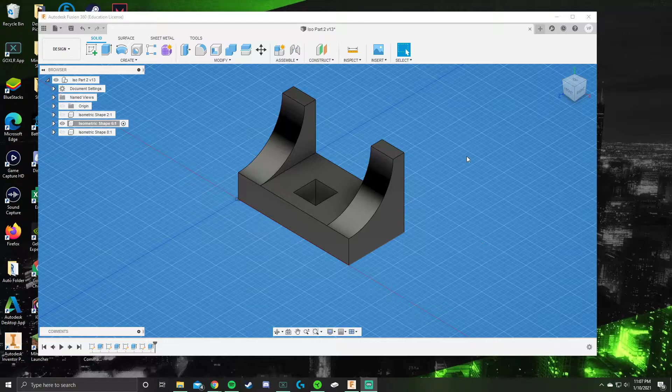Welcome back. In this video, we're going to be designing the isometric part 6. So here it is, the finished product. And this is what you guys will be starting with.

The first thing I like to do, we're going to do a different approach. We're going to do an additive and subtractive manufacturing design.

For this first one, we're going to count our rectangle here at the bottom, and then we'll add these skateboard ramps after. It's 2 high, so 2 times 0.25 is 0.5. Then we'll count this length: 1, 2, 3, 4, 5, 6, 7, 8, 9, 10. So we have a length of 10. 10 times a quarter, 0.25, is 2.5, so that's nice and easy.

And then we'll have a depth of 1, 2, 3, 4, 5. So a depth of 5 times 0.25, which is 1.25. So 2 by 10 by 5.

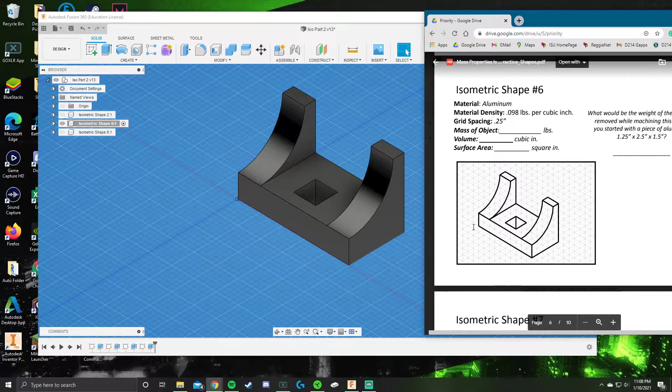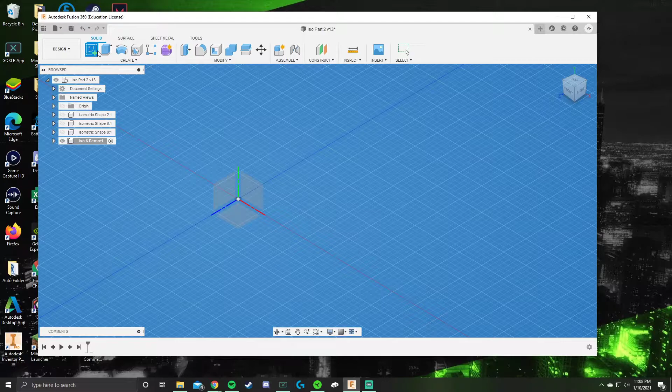Get rid of this, I'm going to make a new component, because this is the finished product. ISO 6 demo. I'm going to make it my active. All right, there we go. We're going to do the XY plane as always.

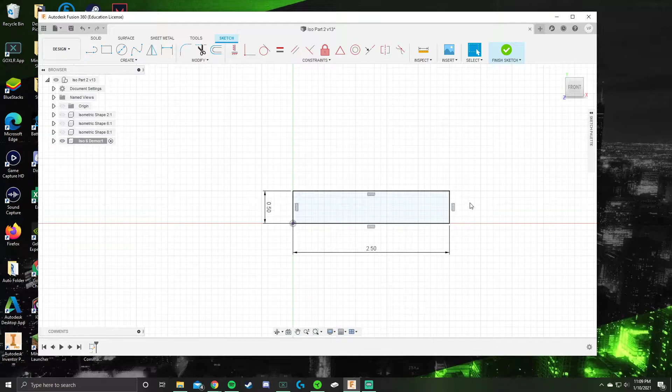Make a new rectangle, so we set it at a height of 0.5, then by 2.5 because it was 10 boxes. I'm going to change my background, sorry guys. Then we're going to extrude it back 5, so negative 1.25. By now you guys should be familiar with the units and counting.

Because if you guys are doing 6, then you guys have already done a few other parts. So we're going to save as always.

The next thing I'm going to do is make this hole here because we can kind of do the ramps at the same time. So we're going to do this hole. It's a complete perfect square, so it's 1, 2, 1, 2 each side. And then it goes all the way through. The only thing we have to be careful about is where it is. You can tell that this hole, the depth was 5.

So there's 2 squares in the back, 1 in the front, and it is completely centered from the sides. You can count 1, 2, 3, 4, 5, and 1, 2, 3, 4, 5. So completely centered, but it's 1 box off the front. So the center of the box is going to be 1.25 off each side, and this is going to be a quarter, 0.25, off the front.

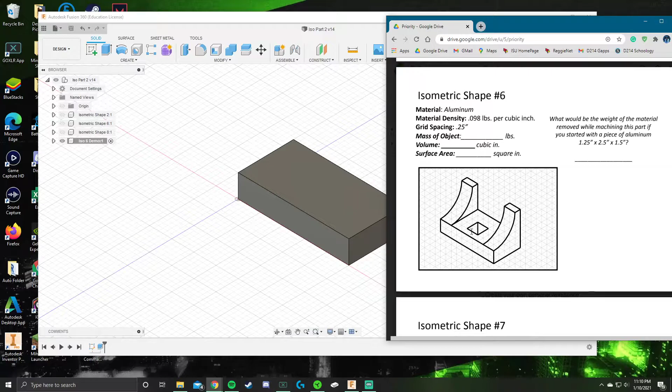So let's do it. I'm going to create a sketch on the top here. Gonna make a rectangle wherever. We said it was a perfect square, so it's 0.5 on each. I'll do that, and then now I'm going to dimension it off the side.

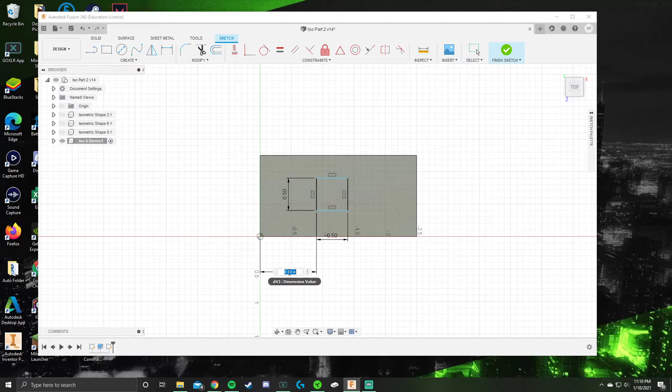We said it was in the middle, so 2.5 divided by 2 is 1.25. We're going to do there. And then we're going to have it off a quarter off the front.

Hold on, guys. Something looks wrong.

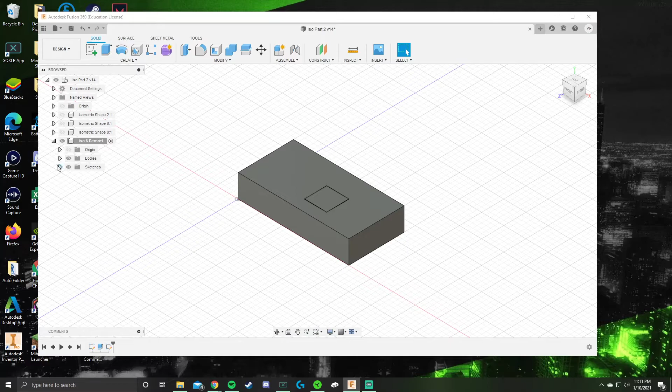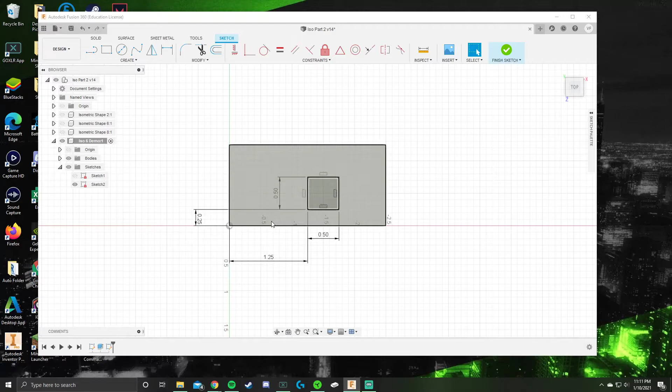Oh sorry, I see what I did. So this is right, but the center of this box is 1.25, so it's really only 1 off the side. My bad, there we go.

So now it's completely centered. You have your 1, 1, and 0.5 because this whole side is 2.5. So there we go, it's perfectly locked down, constrained. We're going to save, we're going to extrude, cut the whole way. There you go.

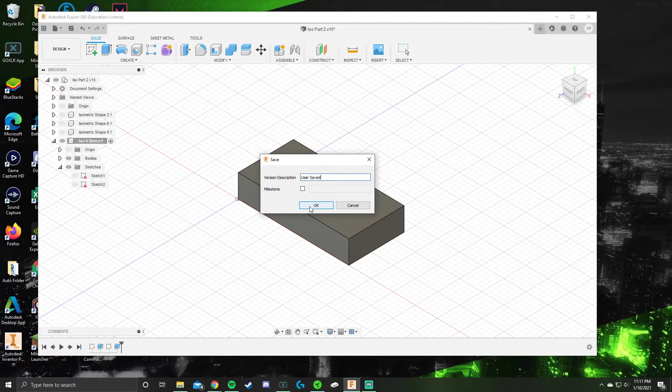Save again. Next thing we're going to do is our ramps. So the ramps are the whole length, 5 square, and they have a height of 4. I'm going to make a whole rectangle, and then I'll show you guys how to cut these to make the ramps.

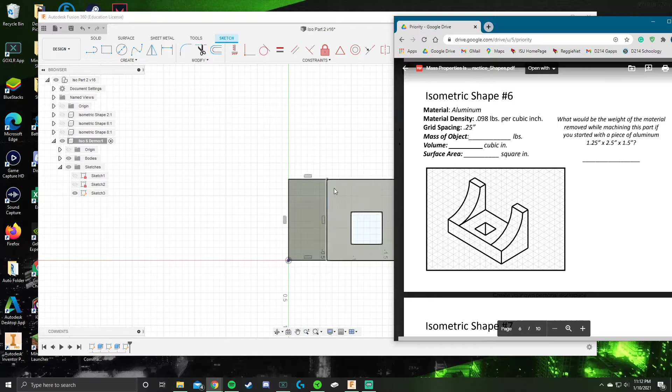So we're going to make another sketch on the top. We're going to make 2 rectangles. We know they're 2 wide, so that's half, and then they go all the way to the back. That's already constrained because the dimensions of our box are already there.

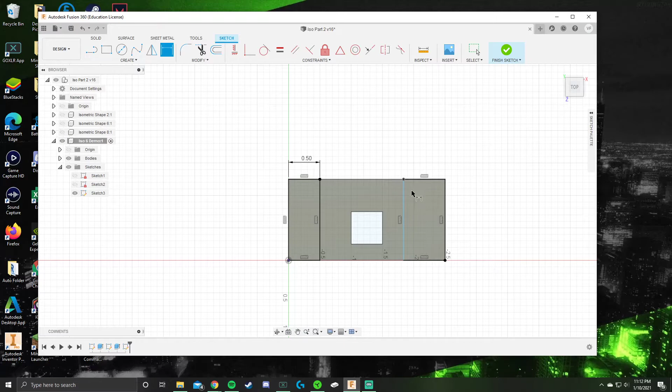So I'm going to dimension this side, it's going to be 0.5. Same thing here, 0.5. And then, like I said earlier, we're going to go up 4 boxes, so I'll go up 1. Grab both of these, go up 1. Boom, there we go. Next thing we're going to do is the ramps.

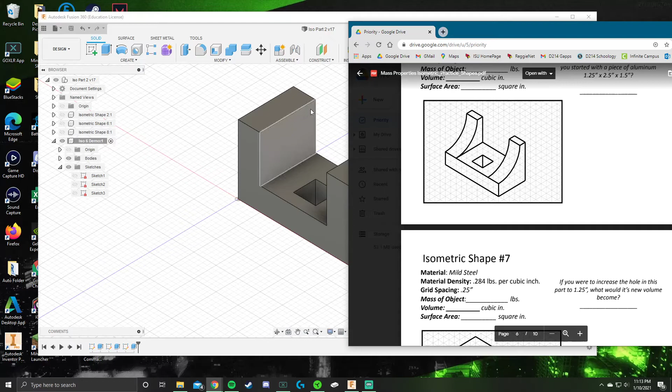So I'm going to use a circle to do it. You could use an arc, which we will be learning next unit, but I'm going to use a circle. If I do a circle at this top corner here, and then go down 1 complete inch, because that's what this is, that'll give me this perfect arc here. Because if this is a center circle, I just need the radius. I'll explain that as I do it.

So we're going to do a sketch on this side. Now if I grab the circle, you can figure out how many boxes it is by doing it. I'll show that first. If I grabbed a circle and put it on this corner, which is the imaginary corner that's not here, I have to go down 4 boxes and also up to the side 4 boxes. That tells you the radius of the circle is 1, because it's got an overall depth of 5 and there's only 1 box left.

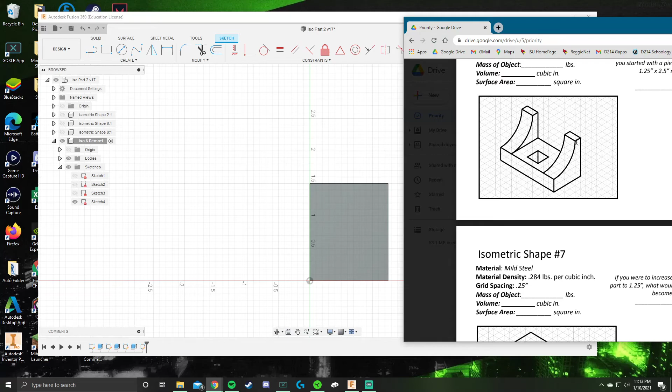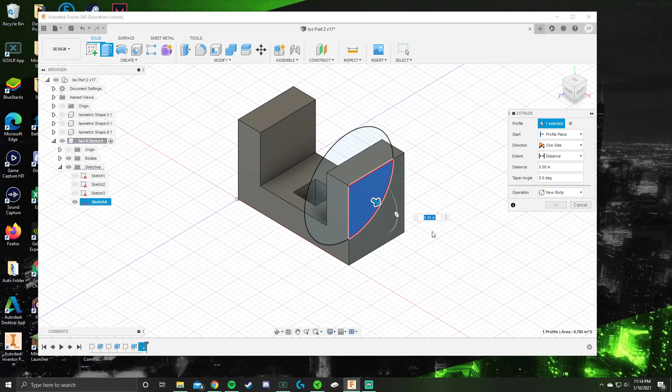So 1.25 minus 0.25 is your 1. Let's grab the circle again. The radius is 1, right? But since we're dealing with diameter, it's going to be 2. Then that's what we want. So then we're going to extrude, hit this part, and just cut it all the way back. And there you go, that's how you do the isometric part number 6.